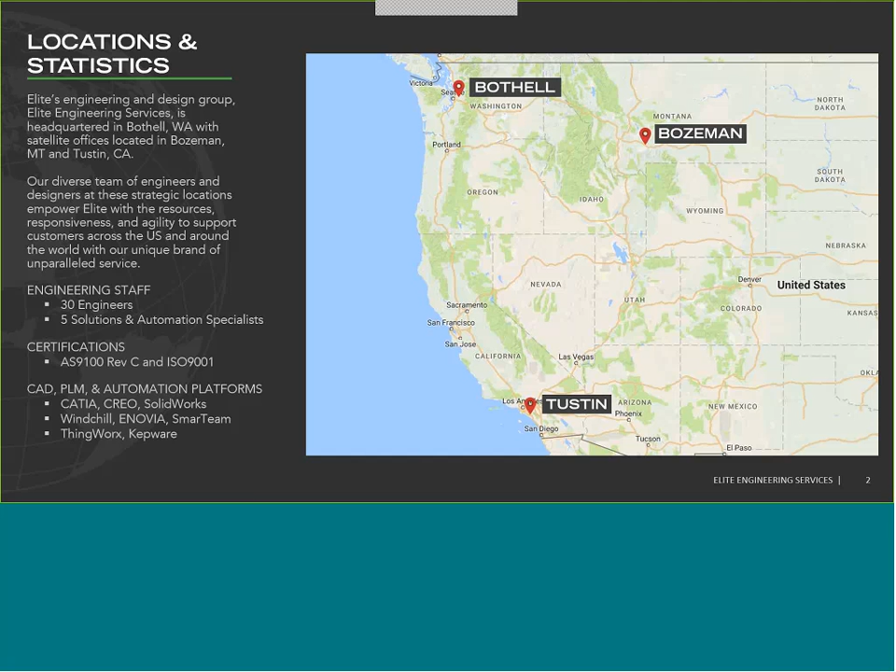So we have a team of engineers. We also have solution and automation specialists. The reason I mention the engineers is that most partners of PTC are just partners. We're actually a partner and a customer at the same time, so we are using the same software that all of you are. Today's meeting is attended by a number of our own employees who are interested in learning about the latest revision of CREO since it was just released.

So you can see some of our capabilities, some of the things that we can do for you. Just wanted to briefly mention them. Obviously, we are here to help with all forms of services, whether that be solution architecture or PLM consulting. We are experienced in setting up, upgrading, modifying, and improving Windchill, and of course CAD automation, CAD best practices, methodology, and model-based definition. And of course, as a partner, we can help you with the software, whether it's IoT, PLM, or CAD. We can help with all of those products. So just wanted to very quickly introduce us.

Of course, if there are any questions, please feel free to contact me at any time. And as part of the webinar series, I mentioned in the email you were all invited on, the next one was going to be the Factory of the Future and then MathCAD.

We've actually already made a change based on when we have someone available to present on MathCAD. So next month, we'll be doing MathCAD interoperability, and then in June we'll be discussing the Factory of the Future, getting into some of the capabilities of ThingWorx. I've left the next two dates up - they're still to be determined for the topics, but you can keep the date in mind. If anyone has any suggestions of topics they'd like to see, please let me know. We will, for consistency's sake, be aiming for the second Tuesday of every month. So I imagine at least one of those upcoming ones will talk about PLM, since we're talking about CAD, MathCAD, and IoT in the upcoming events.

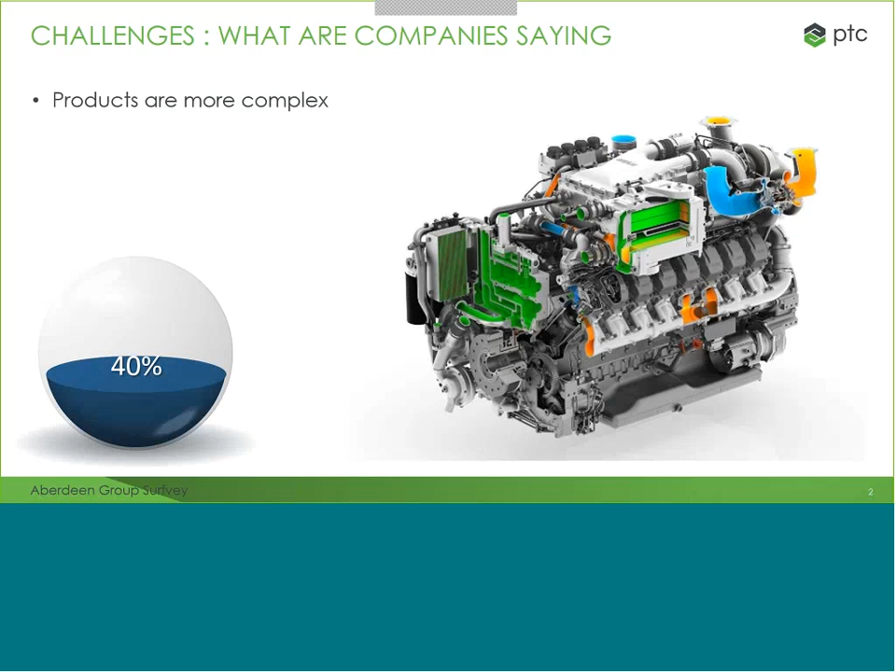So with this year's update, previously we did some surveys, and we found out that about 40% of our customers are having products that are more complex. So it's taken a lot longer for them to get the job done, and they want some shortcuts and more intuitive and better ways to go about making parts. We also found that 56% of our customers need to be more efficient - they need to beat their competitors to market so they can get out there first.

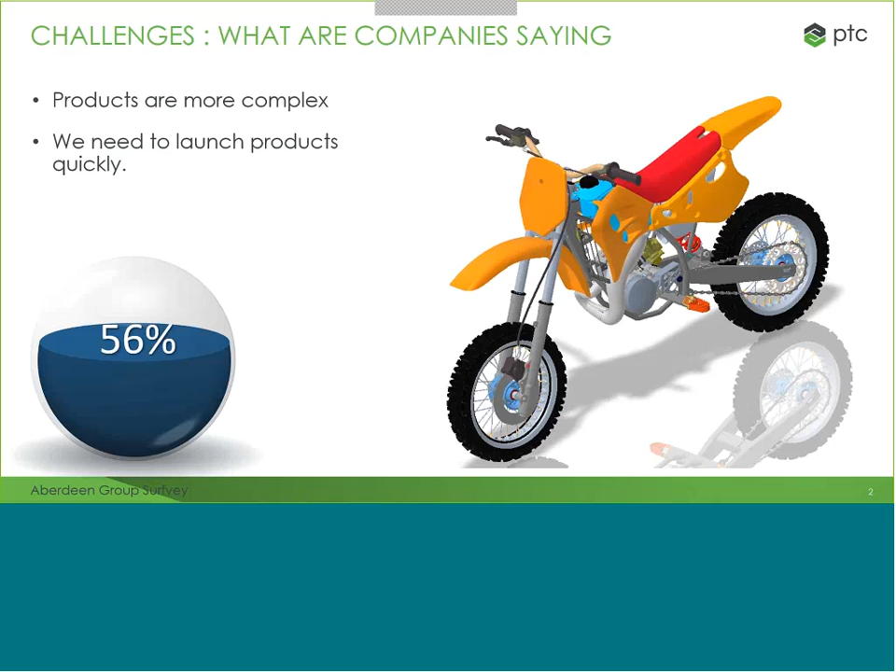We also found that 47% are looking to leverage data sensors to make optimal parts. So they want to bring in data from real-life scenarios and use that data to drive their 3D CAD model design and work from there.

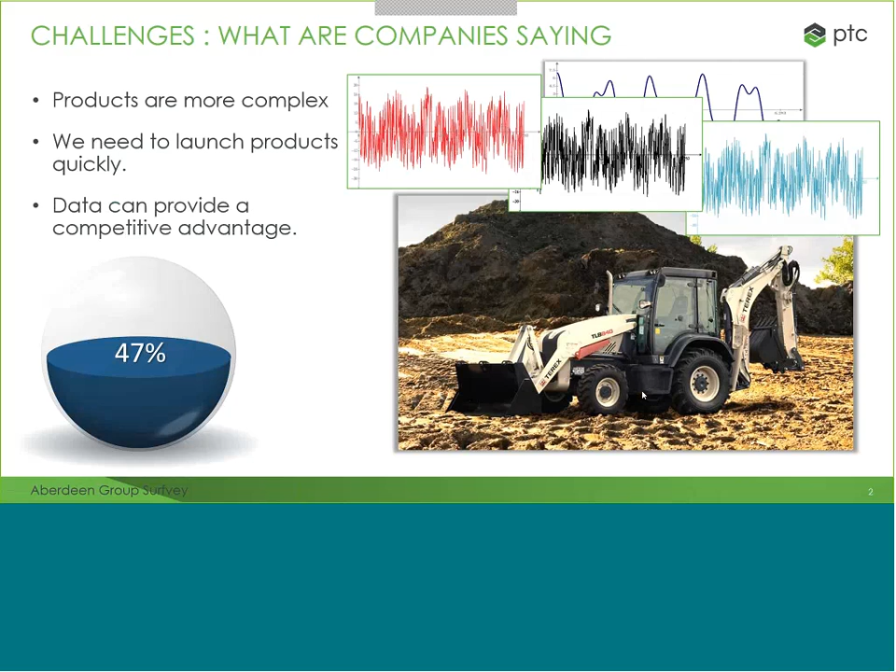So we believe we addressed all these issues right within CREO Parametric 5.0. CREO Parametric enables companies to accelerate product innovation through greater use of CAD data and by replacing assumptions with facts. So today, during this demonstration, I'm going to cover what's new in CREO Parametric 5.0 by going over some of the productivity improvements we've made right within base CREO, and then also some of the modules right within base CREO as well.

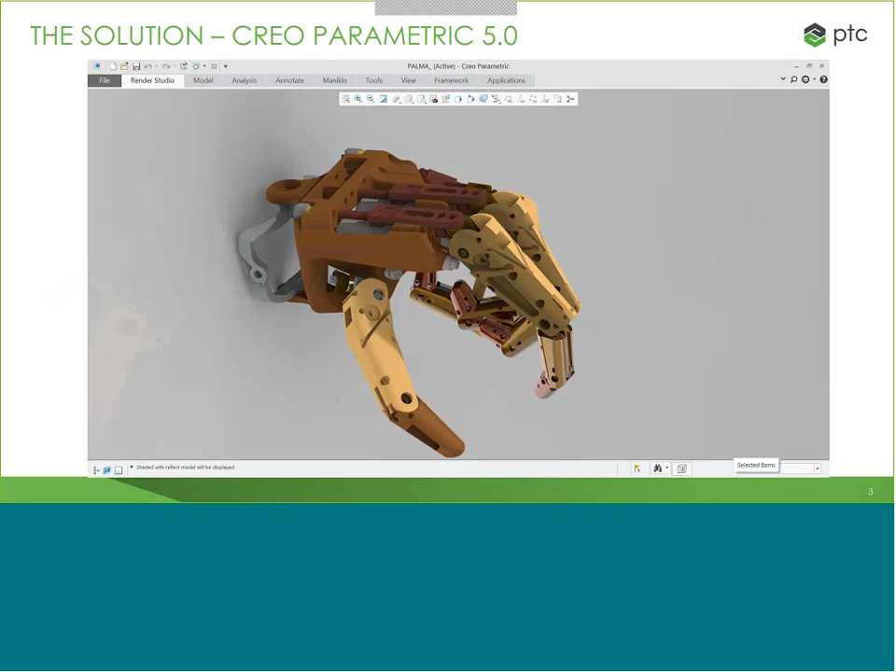To start with the productivity improvements, we've expanded and now instead of just having 2D sweeps, we have 3D sweeps available too. Now you can accurately use 3D geometry to represent grinding tools and simple machining tools when making sweeps on your parts. We're also going to add more 3D representation tools in the future.

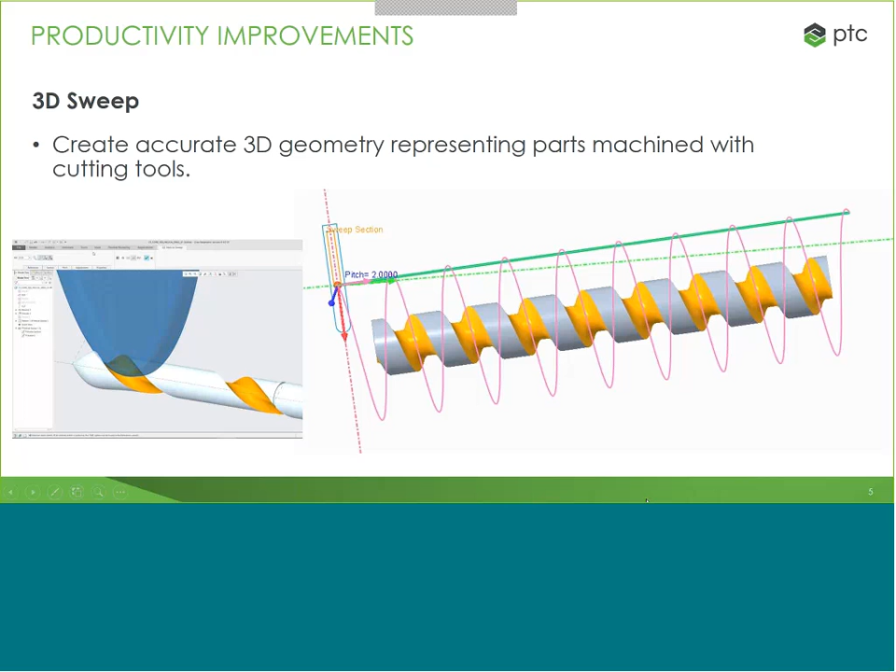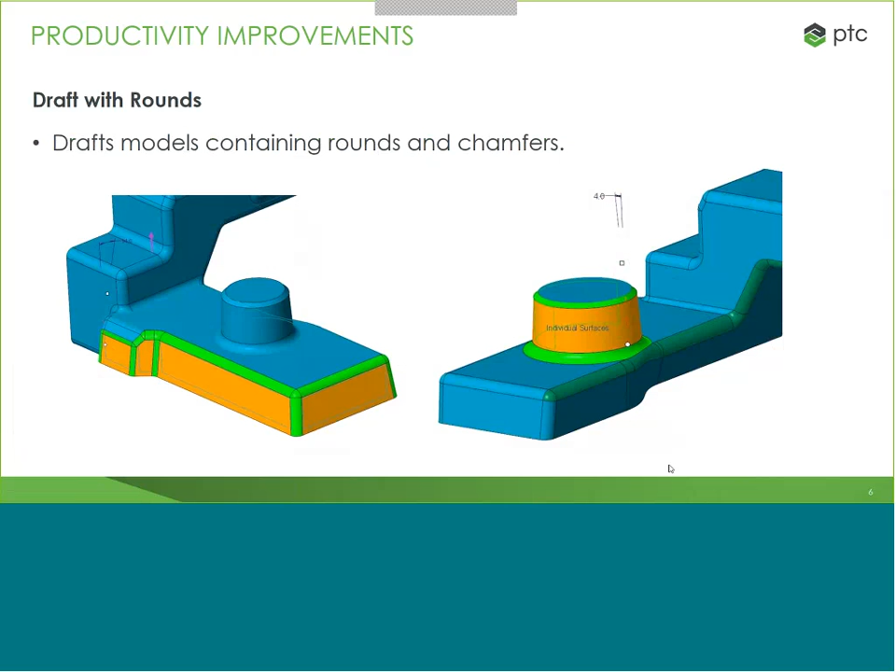We've also upgraded drafts and rounds. Previously, you had the option to make drafts with rounds, but if you already had a round or chamfer there and wanted to add a draft, you weren't able to. You had to go back, delete that round or chamfer, make the draft, and then make the round or chamfer again. Now we've simplified that process a bit, so the program will recognize that's a round or a chamfer and just add that draft right on top of it. Makes everything a little more simple.

As far as the feature mirror improvements go, we've also added geometry preview. Previously you couldn't tell what you were going to mirror across that plane, but now you'll have a pretty good idea of what it's going to look like before hitting the accept button. Also, you're not going to have to bring over the entire sketch. You can just pick what sketch lines you want mirrored and go from there, adding and removing different features.

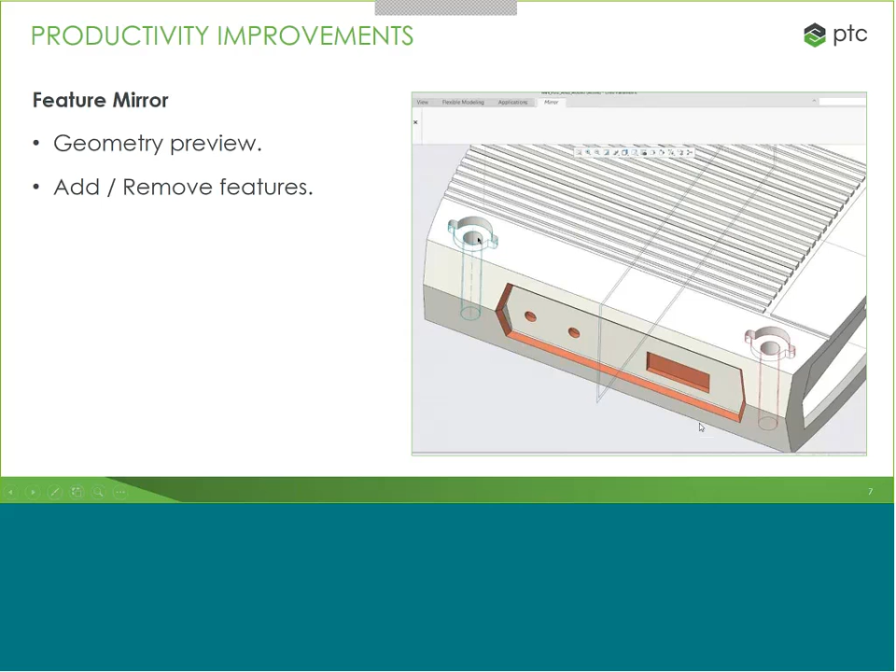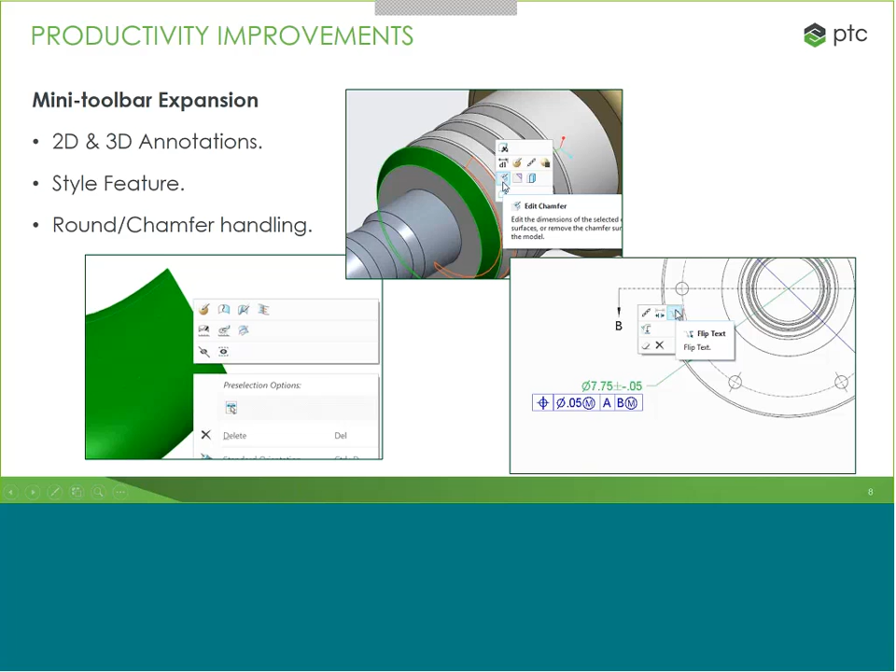The round and chamfer handling has also been improved a bit, so you'll be able to right-click right over those rounds or chamfers and easily edit it. Those edit options will pop right up for you. Makes everything a little easier—less clicks, less headaches, that's the whole idea.

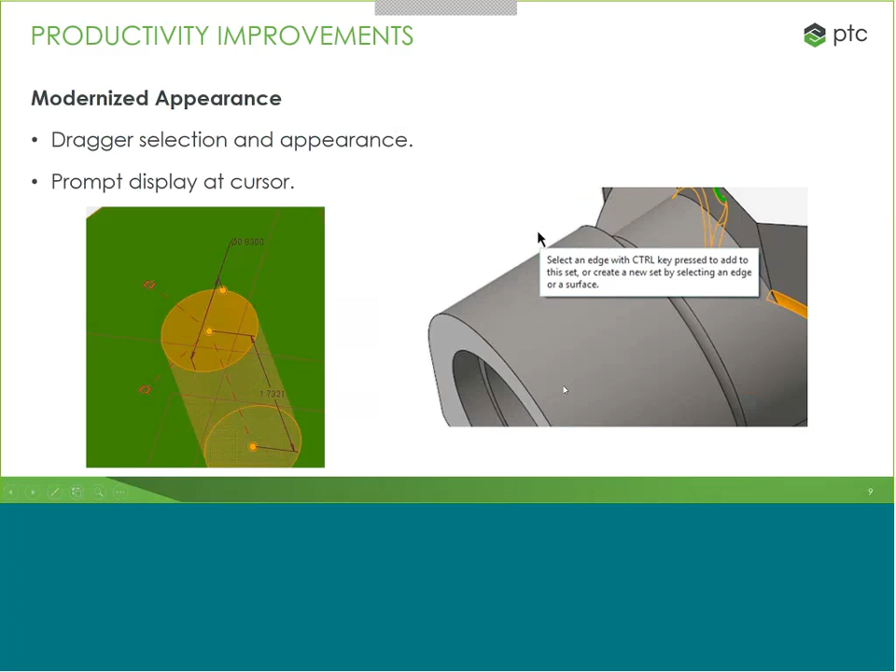As far as the model tree goes, we've added show only and except to that feature too, on top of hide and hide all. That's going to be nice when you're doing larger assemblies, if you only want to see part of it, or if you're going through a design review and only want to show part of the entire product you're producing.

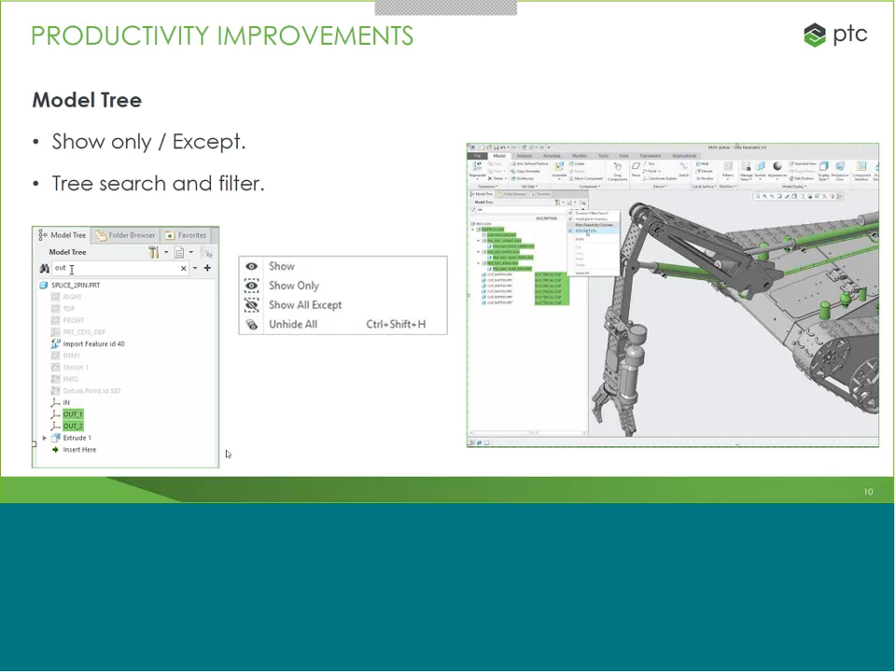A big new feature here is the tree search and filter. So if you're looking for a part—maybe you're working on an assembly you didn't make, so you're not familiar with the model tree and it's just a big mess—you can type in your part name right there and it'll pop up all your parts, all your planes, all the different axes you've created or are looking for. That's going to make your process much more efficient and fluent.

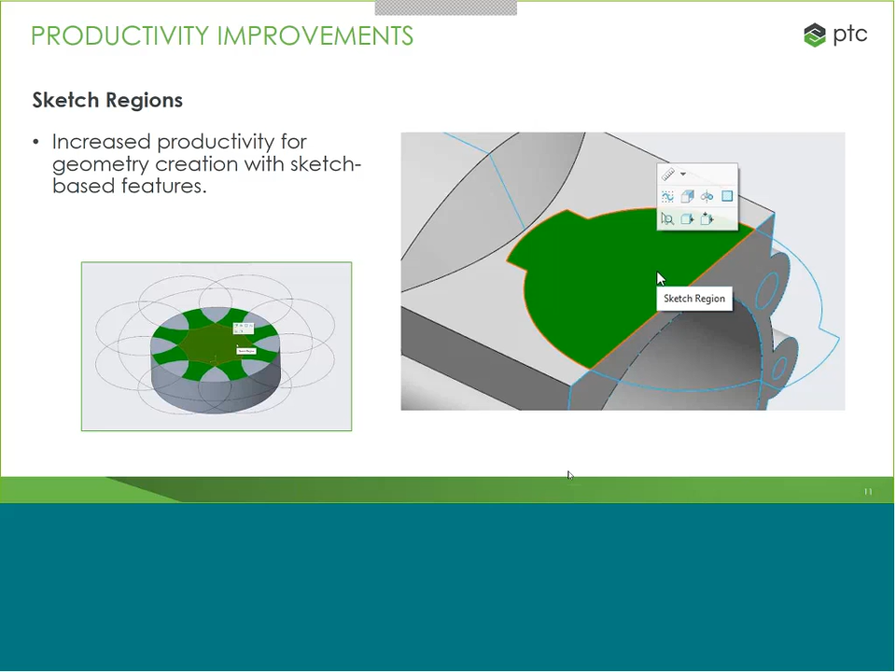As far as sheet metal goes, the flat pattern representation has been improved and simplified. Now you can easily switch from a bent to a flattened state when modeling a sheet metal part. There's also been improvements on the corner reliefs and conversion tools as well.

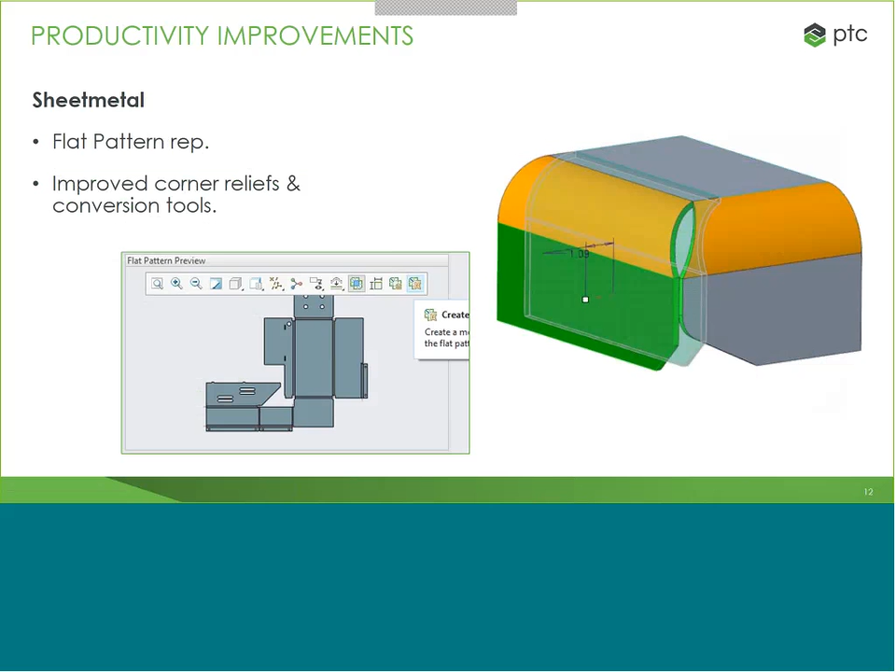The conversion tool now supports conversion of solid parts into sheet metal pieces, even if the part contains non-uniform thicknesses. As far as Unite technology goes, we've now added Inventor to that.

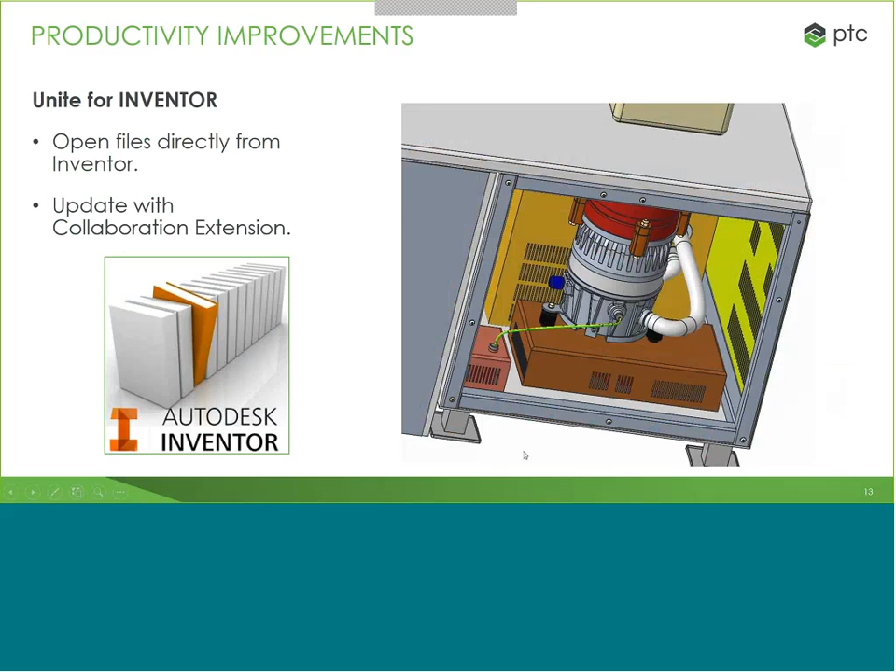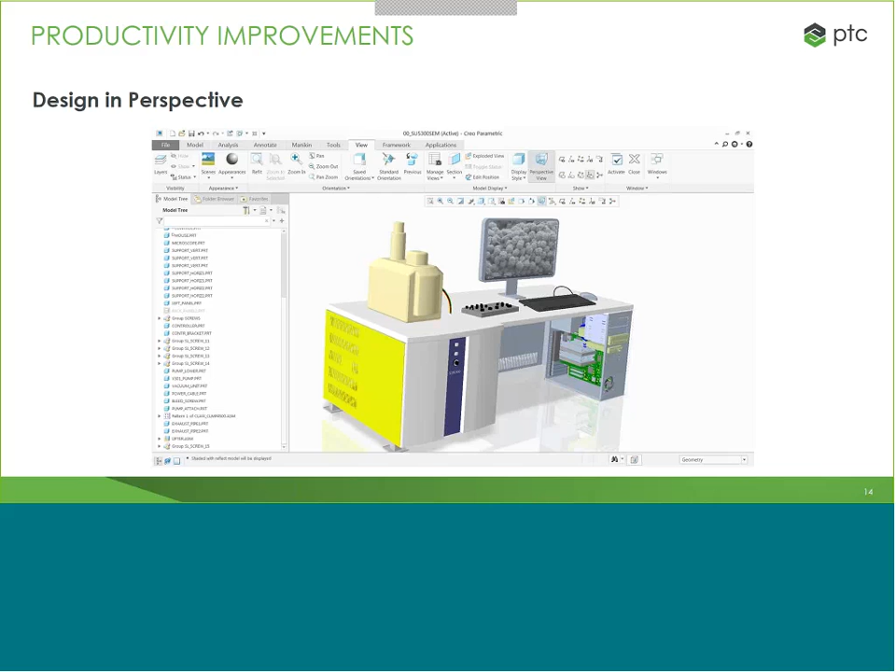As far as freestyle goes, we have a new import preview. Instead of having to go through the process of importing different assemblies or parts and wasting that time, you can just do a quick import preview, and it's going to show you that geometry mesh of the part ahead of time, just to make sure you're importing the correct part and it's not going to be broken when you import it.

And align with curvature, you can push and pull however you'd like. On top of that, we've also added a box creation mode, and that's just going to be another tool that helps you work on the different facets of your model and gives you more options for modification in general.

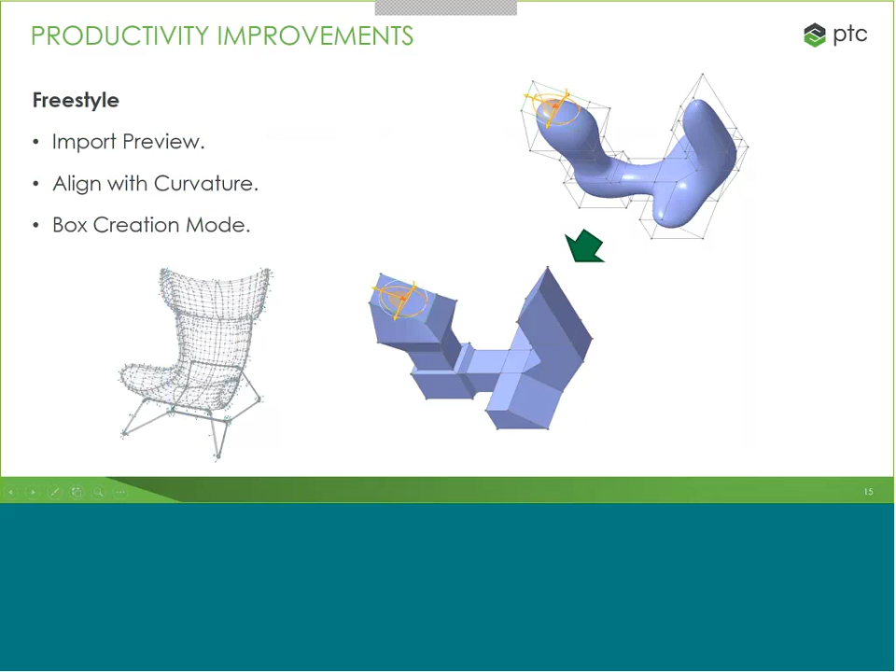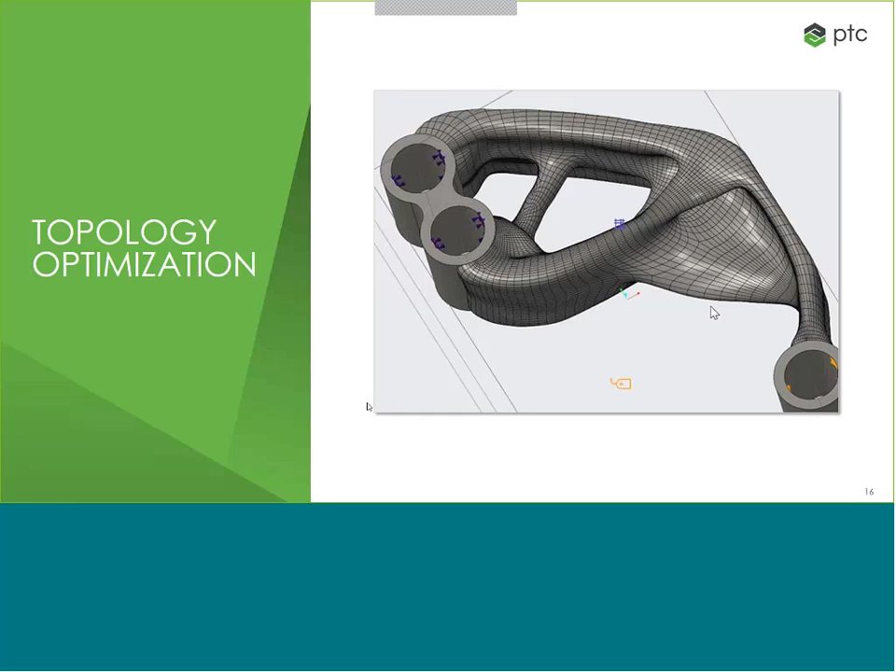All right, so now let's move on to some of the new modules right within CREO. The first one we've added is topology optimization, and the idea here is that physical design of products is limited by human imagination and often exists in designs and development practices as well. So we wanted to have topology optimization and use that to enable the automated creation of optimized designs based on different constraints.

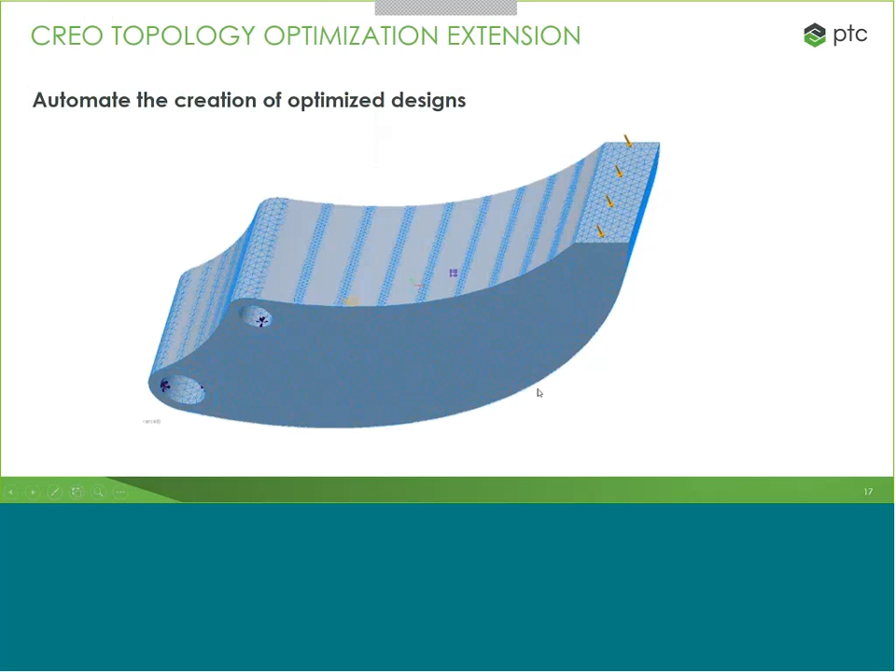So if you look at this tooth here, or this piece here, you're going to have a number of different forces on this, creating different stresses and strains, just based off of testing we've done in the field. And this part works, but maybe we could use a little bit less material.

So with that topology optimization, we're going to be able to say, hey, we want to keep these the same. We want to keep these right in the same position. Don't touch these. We also want to have our part not lose its original design intent. So with topology, we can go ahead and find this geometry mesh and find the optimal part shape.

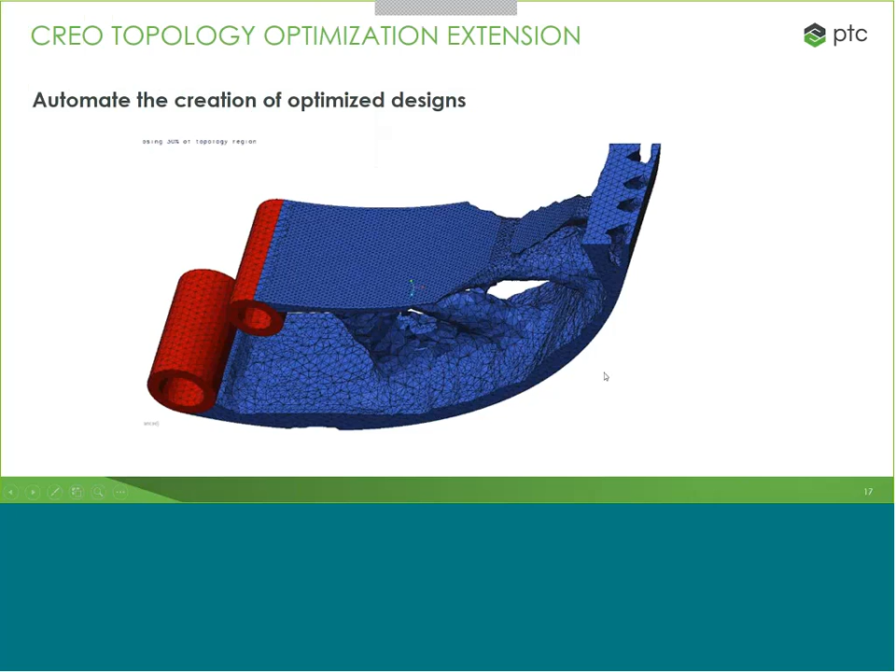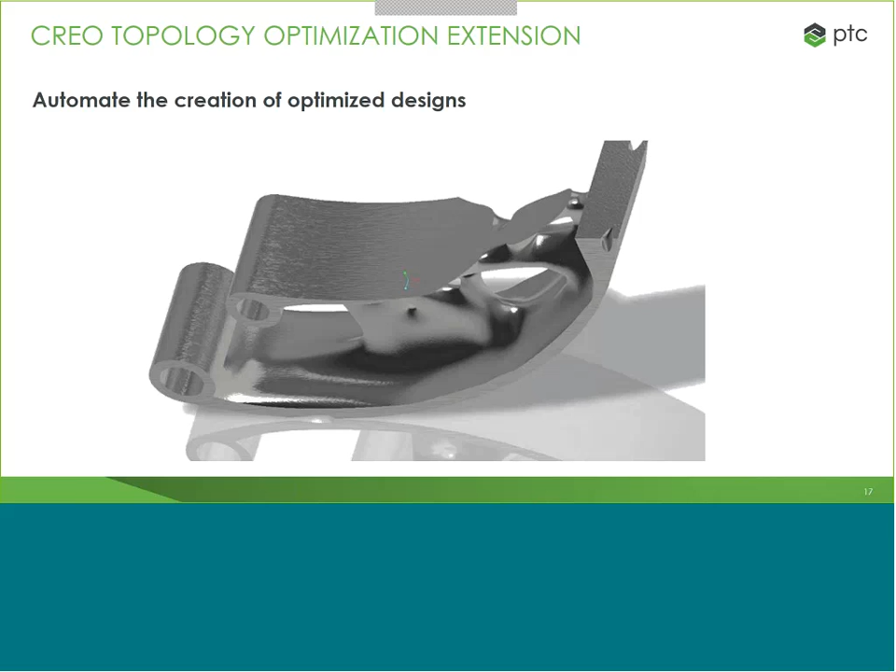But since it's integrated right within CREO Parametric, now we can actually go and create a parametric model surrounding that topology geometry that we've produced. So you're going to be able to have parameters, have constraints, and then figure out the optimal shape based off of those, and recreate the product entirely for you.

So like I mentioned, this is fully integrated right into CREO. You're not going to have to go out and use third-party software and so forth. And not only are you creating your tessellated surfaces, but you're creating a parametric geometry. You're literally creating a new part altogether. Most programs do one or the other, but with CREO, you have them right in the same software.

And when paired with CREO Simulate, using structural, modal, and thermal analysis too, you can go ahead and optimize just about everything about that part, and drive optimization against multiple objectives simultaneously. So you're going to be able to find a part without even having to create it. You're going to be able to create parts that were previously unimaginable.

Now on to additive and subtractive manufacturing extension. This technology keeps on developing over the years, so we keep building ours. And the idea today is we want you to be able to have the same software to design, optimize, validate, and do 3D print checks right within the same program. So that's why we have this extension right within CREO.

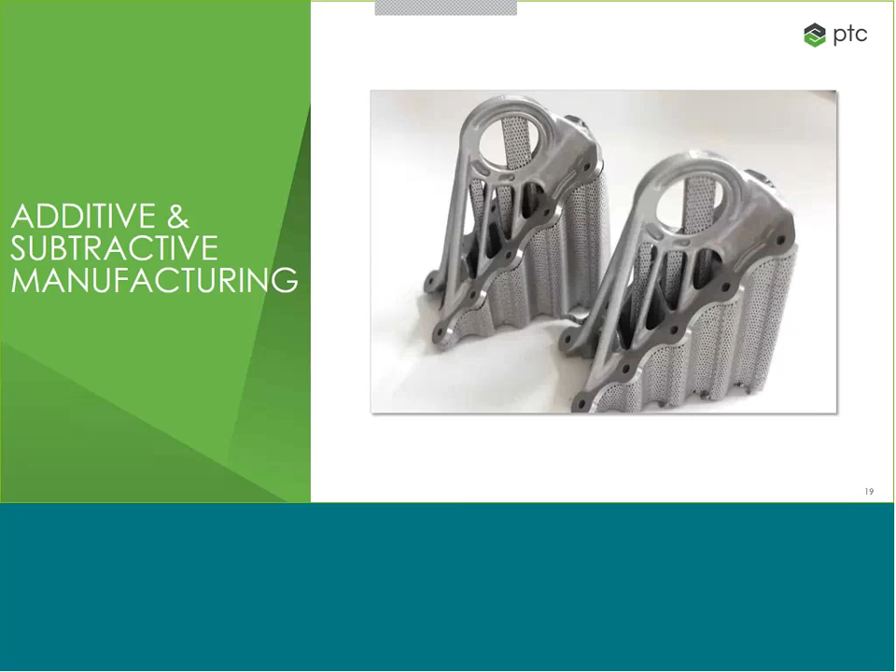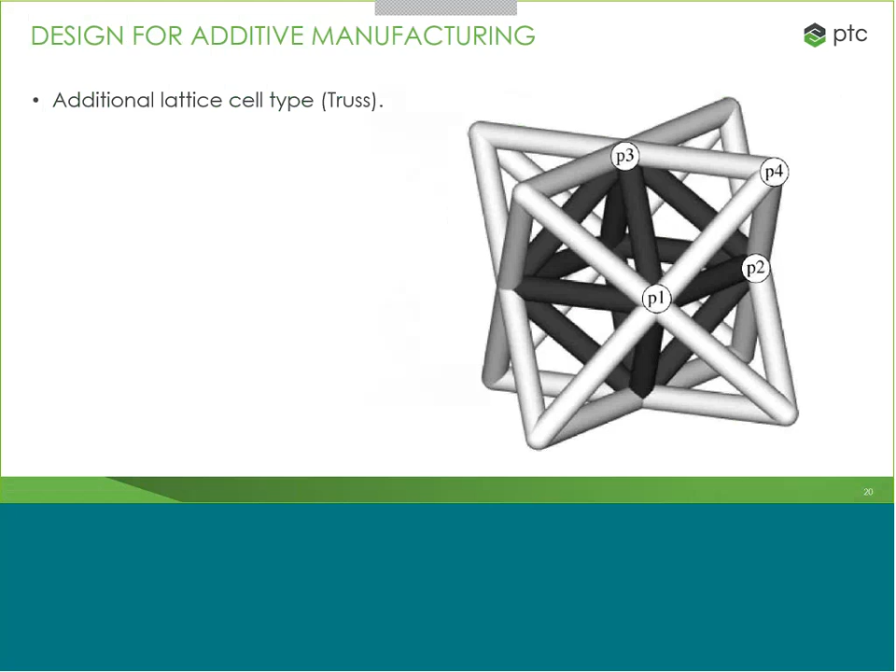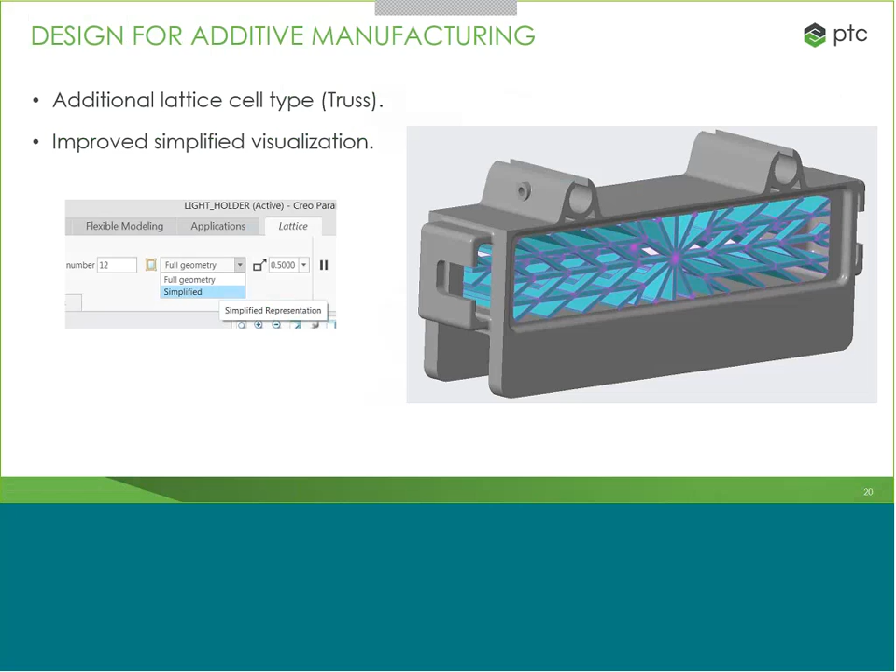Some of the improvements we made here is we've added another lattice cell type, and that's the truss type. It's giving you more options to play around with when creating your lattice features. And we've improved the simplified visualization as well, so now it's just going to be a lighter weight visual for us. It's going to be really nice when you're using huge lattices and you want a quick preview of it before you go ahead and hit accept - you're going to have that option to just improve speed there.

And now we also have the support of conical beams as well, so you're going to be able to optimize your part using these lattice features. On top of that, you're going to be able to optimize the shape of the lattice features, having less material and making your product look more streamlined. This is going to be a great pair with Creo Simulate because you're going to be able to optimize the power of 3D printing and lattice features altogether.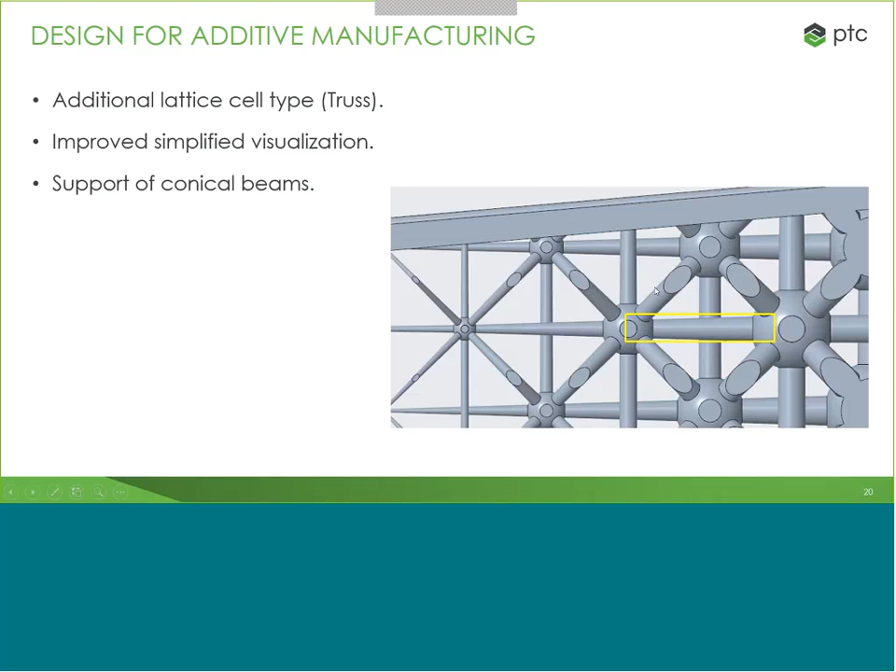Like I said, the industry keeps upgrading, and now metal printing is a huge thing. So we've added 3D metal printer connectivity to about 70 different metal printers across the world. We've also upgraded the printer management to be a little more intuitive - you can actually see the printer.

We've also added some tools to automate support structure generation. This is going to really allow you to utilize all the amazing capabilities and innovation that 3D printing provides. And with this extension right within Creo, you're going to be able to manage, track, store, and reuse all of your printer apps right within Creo.

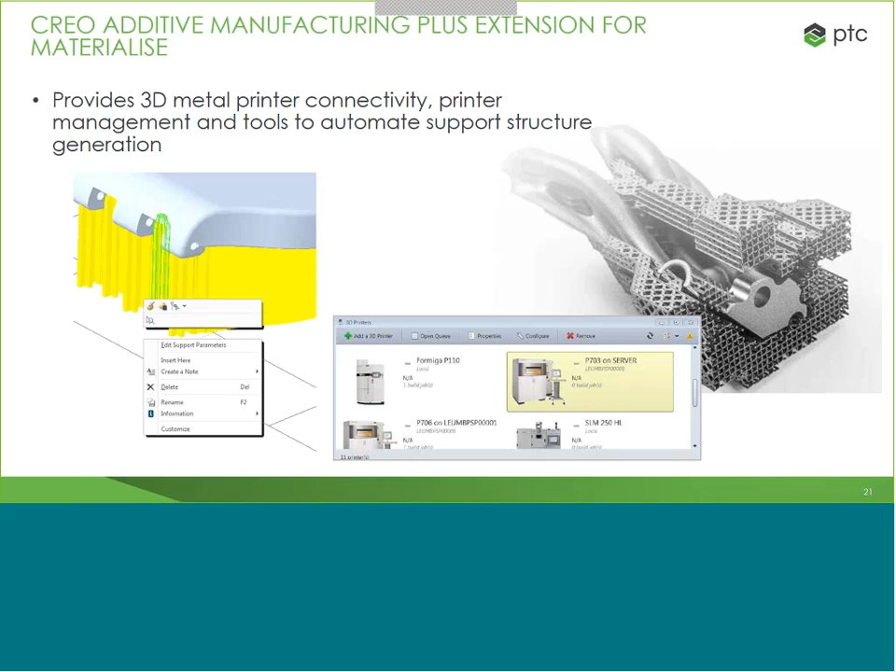Onto our next extension, the Creo Mold Machining Extension. This is also fully integrated right within PTC Creo. We're trying to keep you all in one software, not having to use third-party software and a lot of data transferring. So what this new extension does is it really focuses more on molds, cavities, positives and negatives too. It's going to be nice for processes where you're trying to get rid of a lot of material and then maybe use a smaller drill bit at the end to have a nice finish.

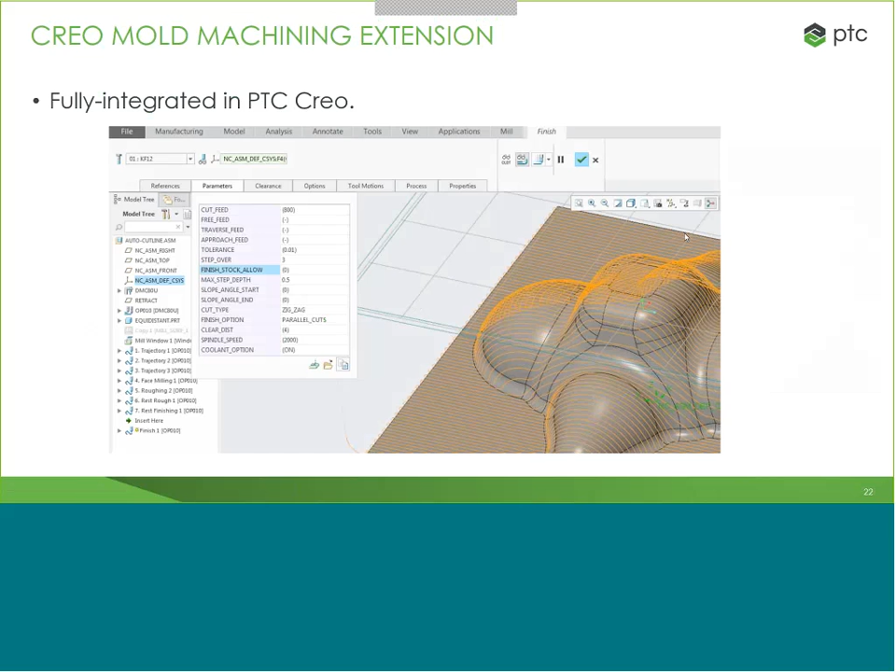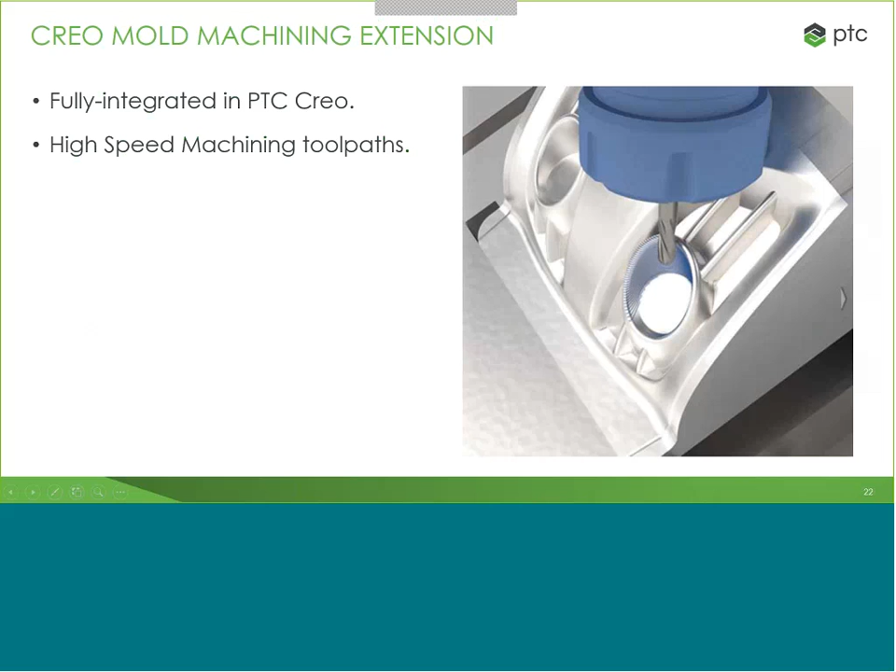So with this new extension, we're supporting the high-speed machining toolpath, so you're going to really reduce time to create the part and the toolpath altogether, so you can utilize your machine tools to their full ability. And you can take advantage of any of the multi-processors that you might have too. Keeps you all internal and very efficient.

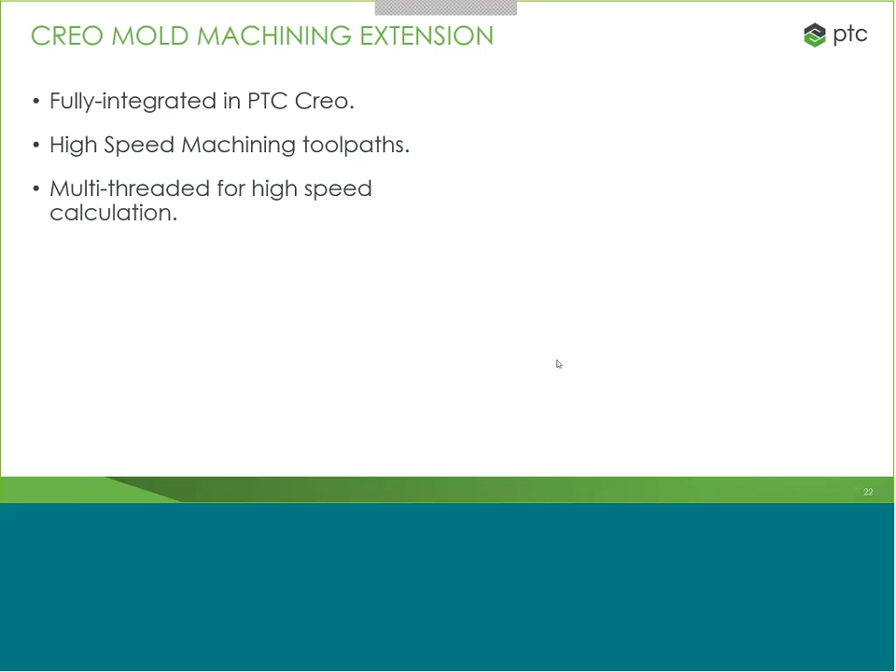Advanced roughing and rest roughing are also going to be available to you as well, and you can also do it as many times as you need. And it's all going to be part of the high-speed machining. It's going to make you more fast and efficient.

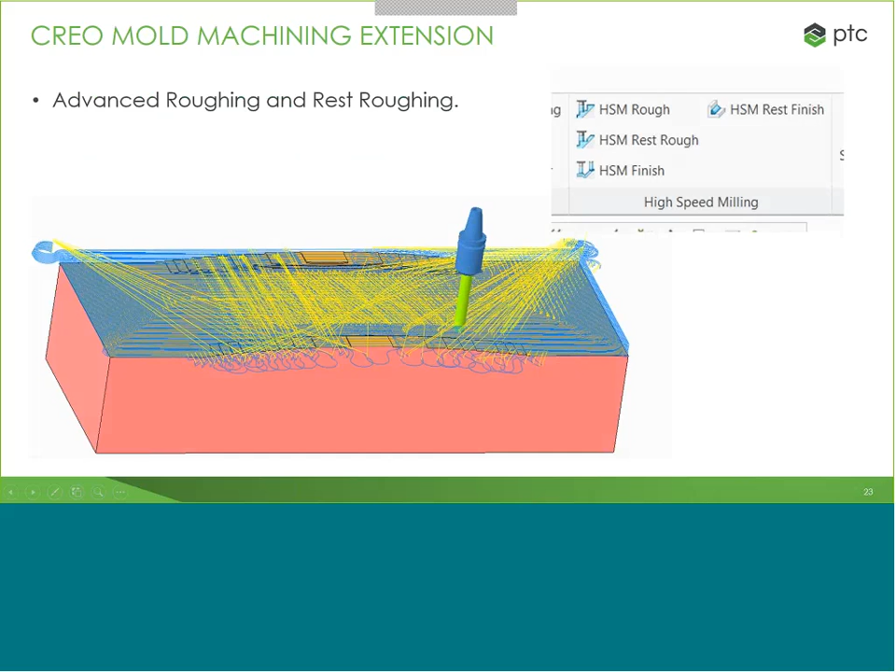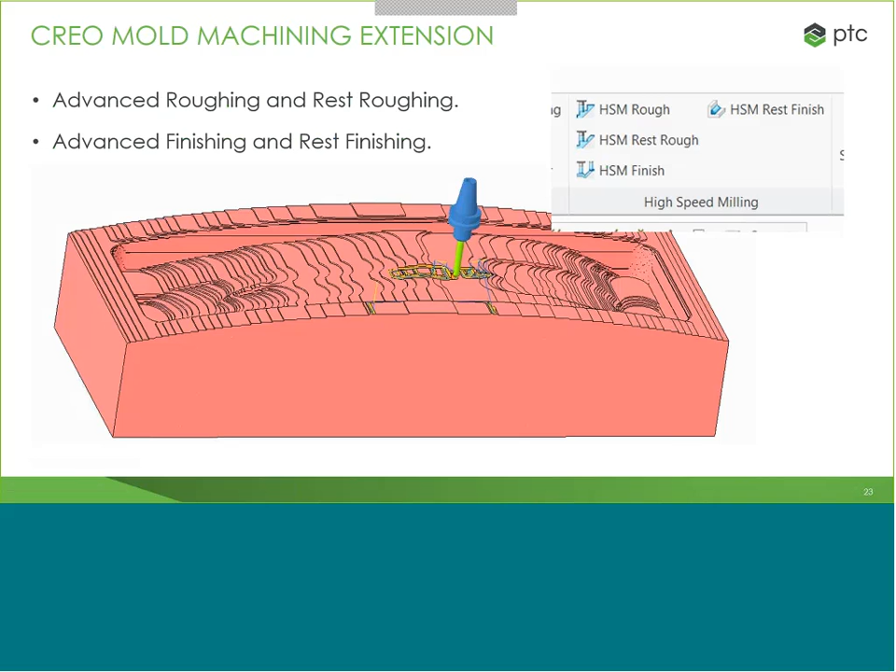And advanced finishing and rest finishing. So this tool is kind of nice because you can switch between bits. So if you have a big piece that you want to take away a lot of material to start off with, you can go ahead and use a big bit, and then when you want to have your piece more detailed and more precise, you can go ahead and change it to a smaller bit, and that's going to make your machining process much more efficient and more accurate.

This extension is a standalone extension because it does also include all full 3-axis trajectory and hole making features as well, but it can also be paired with the previous machining extension as well.

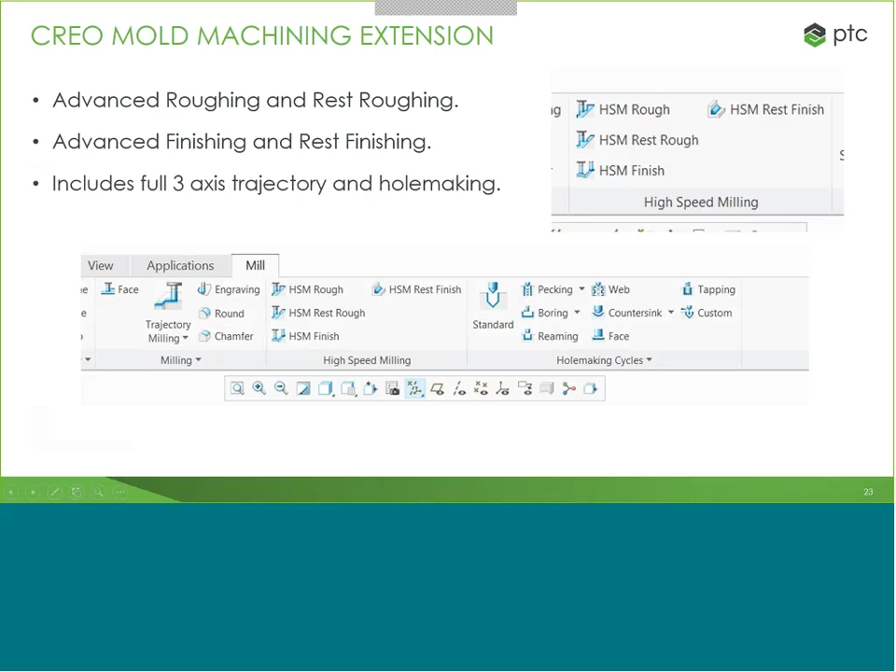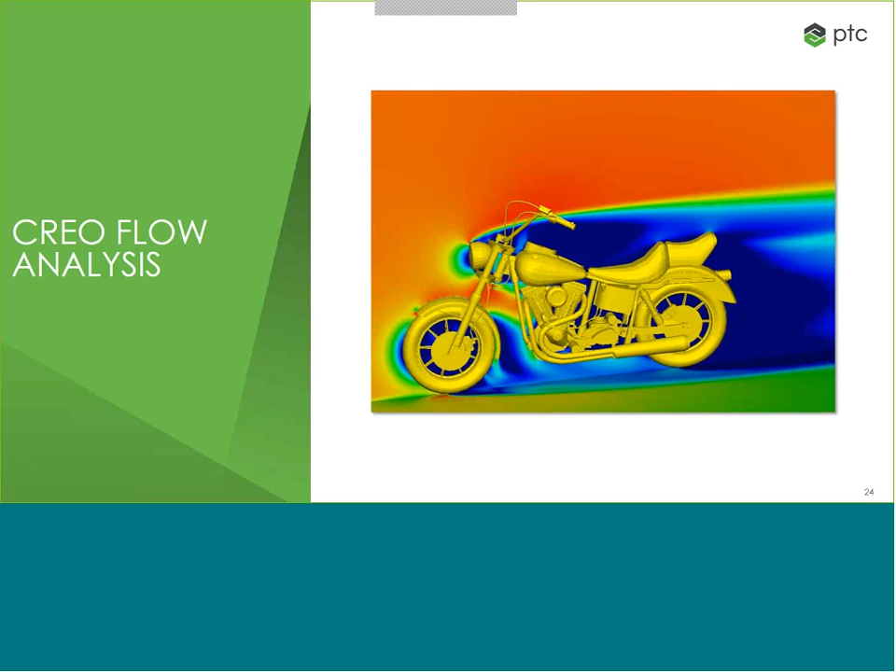And the last module that's added is the Creo Flow Analysis. This enables designers and engineers with simulation tools, and it gives them the power to analyze products much earlier and often, which is really going to reduce the need for rework and faulty products, which is going to save you time, and it's going to be much less expensive to resolve problems earlier in the design process. That's kind of the idea here.

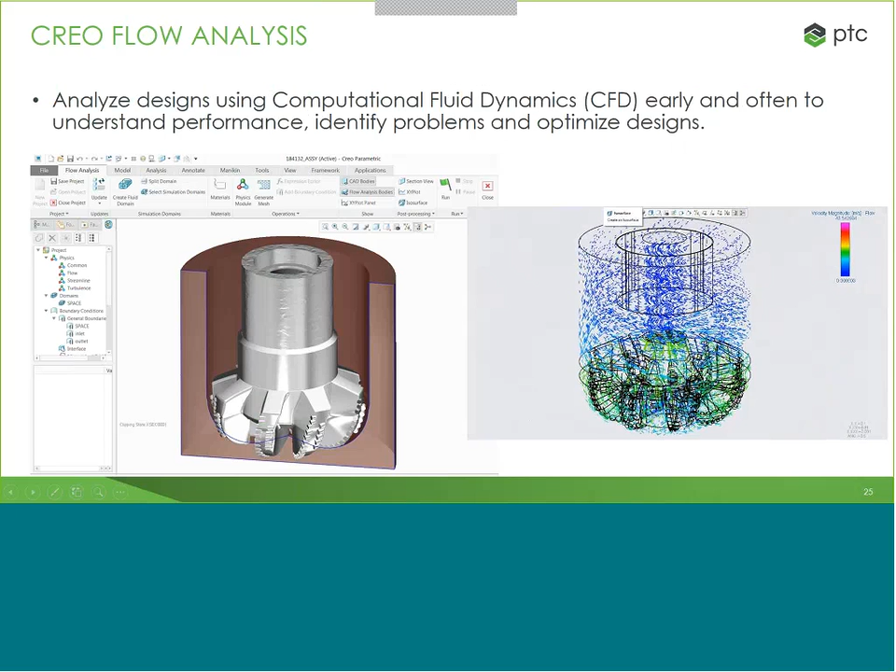Like I mentioned, this is supposed to be for all engineers, not just the specialists. So we want to be able to have the mechanical designers be able to use this tool, and it makes for a very simplified workflow.

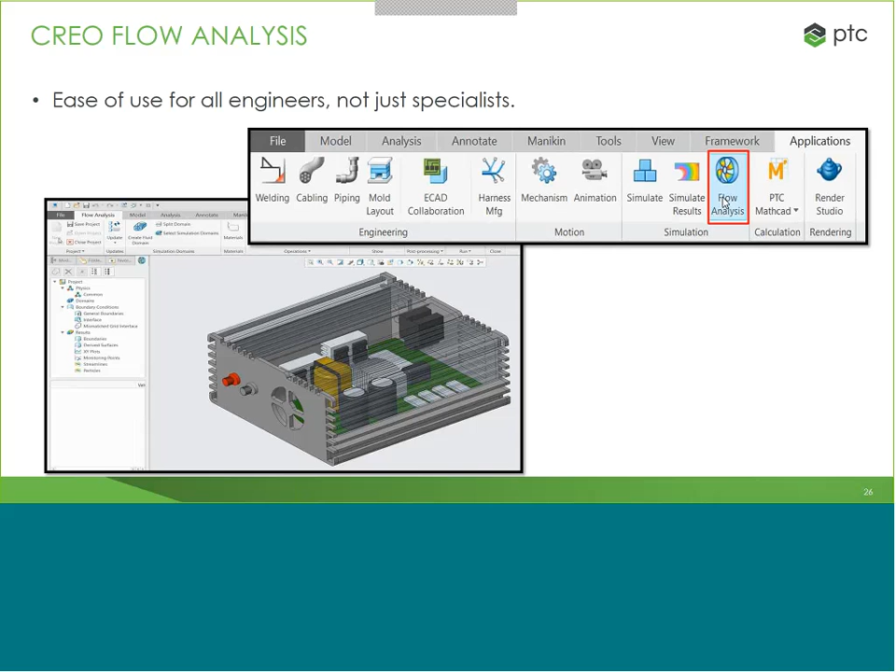And this all provides for a very seamless workflow between CAD and CFD. So you're not going to have to clean up your model and send it over to a third-party CFD program or so forth. You can just go ahead and use that actual CAD model and let that drive your design right from there.

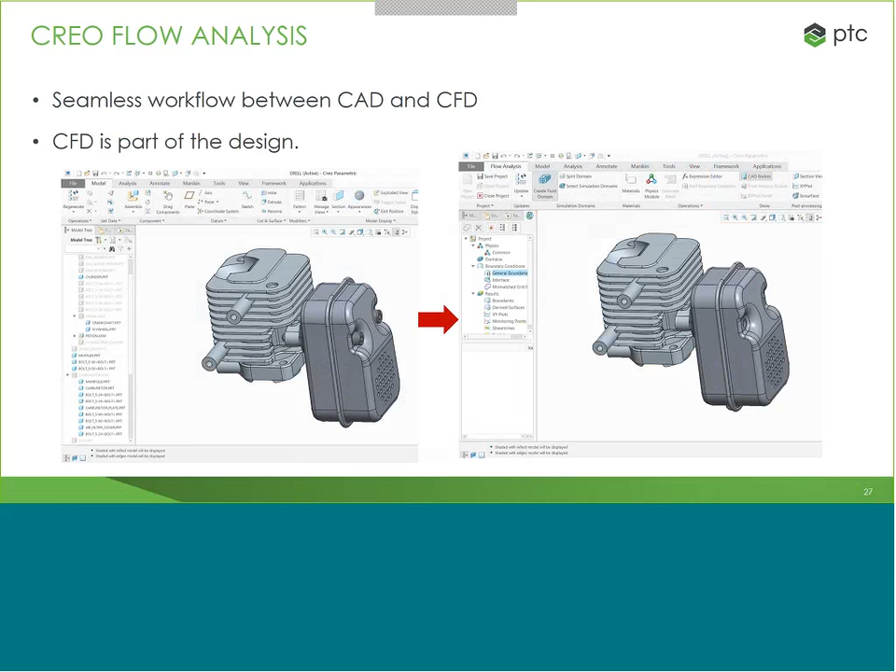And in return, this provides for rapid simulation turnaround with highly accurate results. So it's going to give the power to your designers to get to that optimal and final design much faster. And that's what Creo Parametric is.

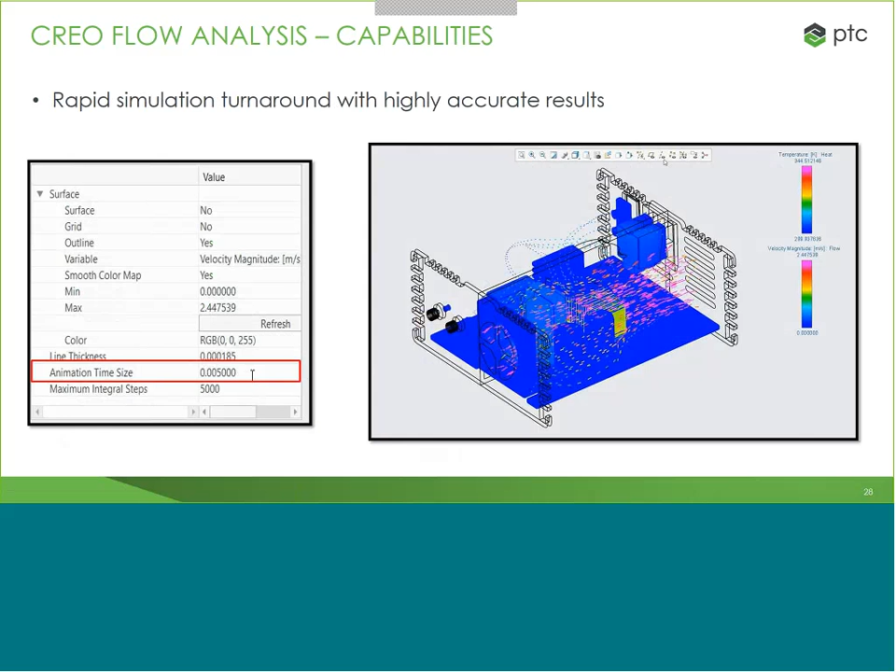That's what Creo Parametric does and is always improving on as well. So with Creo 5.0, we wanted to address some of the issues that customers have had in the past with their CAD solutions. So we made some productivity improvements right within Creo, and then we expanded upon some extensions and added some extensions as well. So at this point, we'd be happy to answer any questions, but that about wraps up today's demonstration.